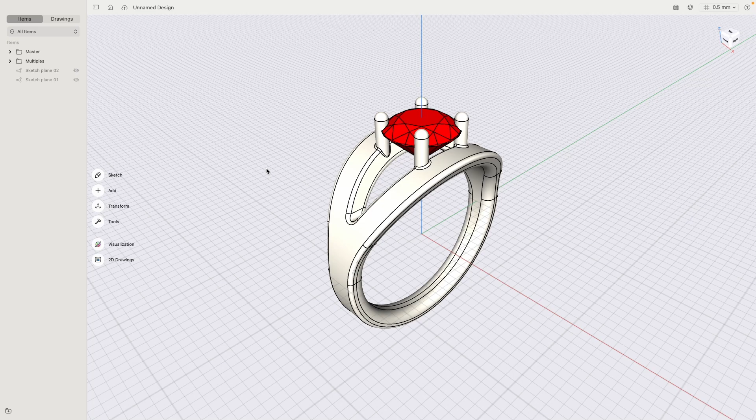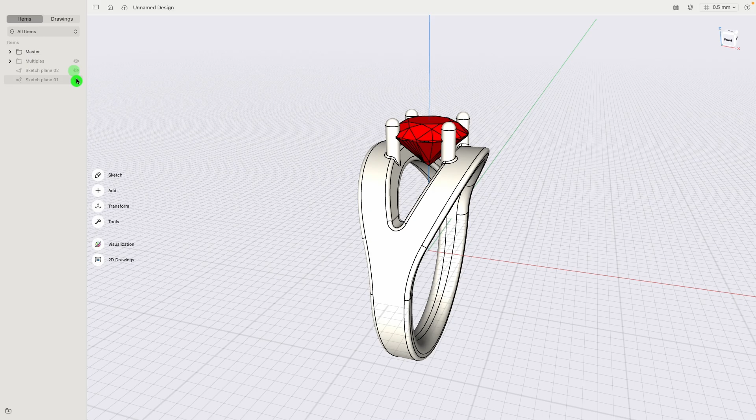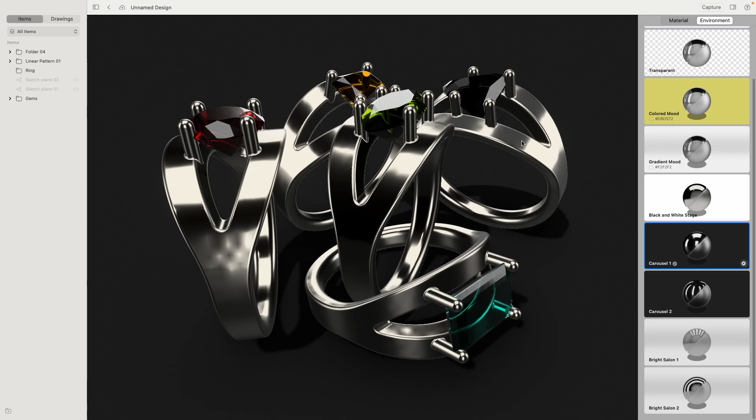Hello everybody and welcome to this tutorial on how to model a series of rings with gems and prong settings in Shapr3D. In this video I will start with the basic layout of sketches, then how we can build a masterpiece, make all our copies, and then bring everything into the visualization tool, add materials, and create really nice, stunning, and dramatic looking product presentations. And with all that said, let's do it.

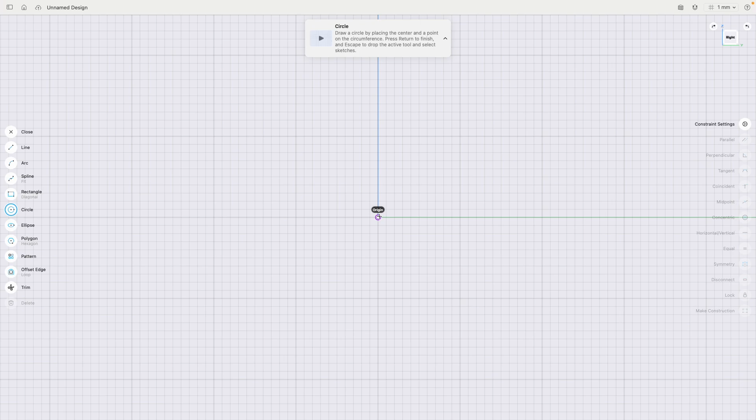Before we get started, let's make sure millimeter is our unit system and we have all our snapping options turned on. We will start with a side view of our ring. Go to the right view, then sketch, circle, and from the origin we will create a circle that is 10 millimeters in diameter. That's the opening of the ring.

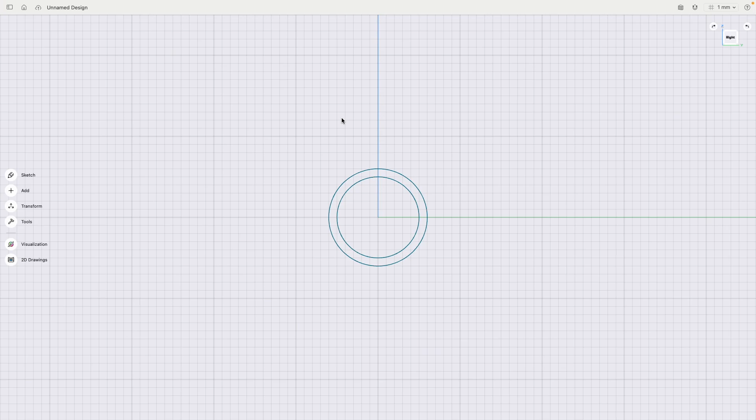And then we will create a second circle, 12 millimeters. That's the material thickness of the ring. Very good, our first sketch is done. We can go into a three-dimensional view, zoom in a little bit, and this profile is what we later would select to extrude out the first part of the ring.

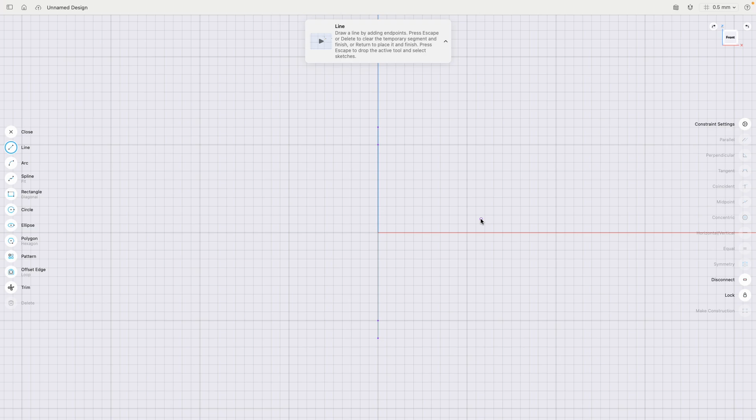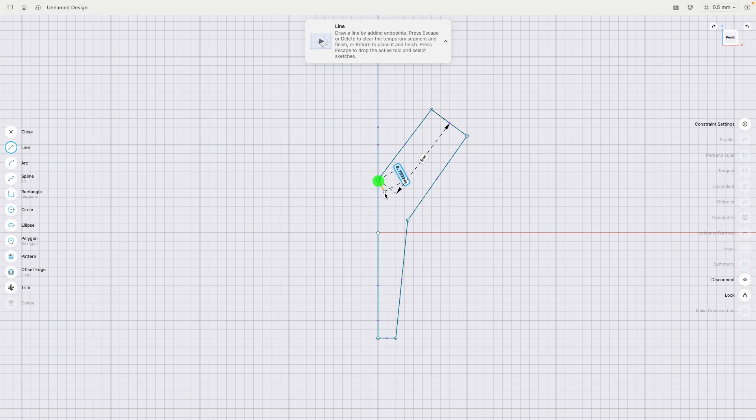But before we do this, let's go to the front view. Go to sketch, and now we will create the sketch that defines how the ring looks from this view. So again, from the origin, I draw a line down, 6 millimeters, then a millimeter to the right, a little bit up, then kind of like diagonal to the upper right corner, perpendicular to the left, perpendicular down, and I finish the sketch by closing it and drawing a line to the origin again.

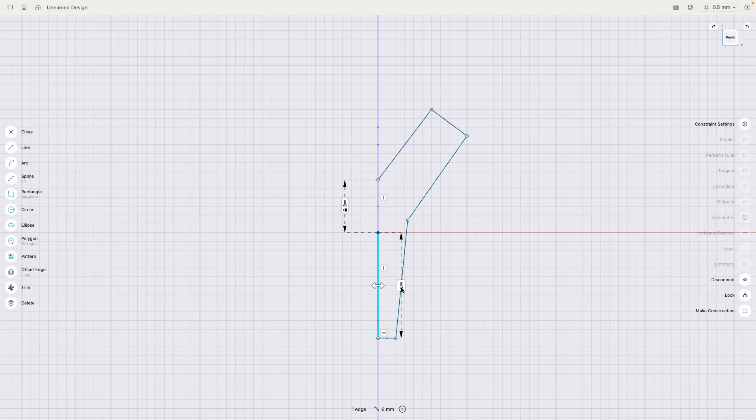Escape to stop drawing. The midpoint we would like to lock so it doesn't move. Select the midpoint and lock it. Now all vertical and horizontal lines we can give a horizontal vertical constraint. Then this line will be 3 millimeters, that is correct. This is 6 millimeters, that is correct. And the small line down here, this should be 0.75 millimeters. Very nice.

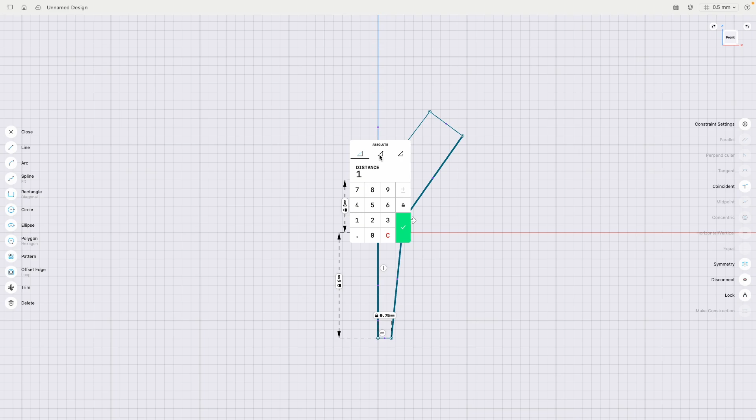From the midpoint to this point here, I would like to have a horizontal distance of 1 millimeter. So I enter 1 for 1 millimeter, and then I will select the horizontal orientation for the dimension. There you see, this is now the horizontal direction. These two lines I would like to be parallel, and then this line to this line will be perpendicular. This line I would like to be 1.5 millimeters.

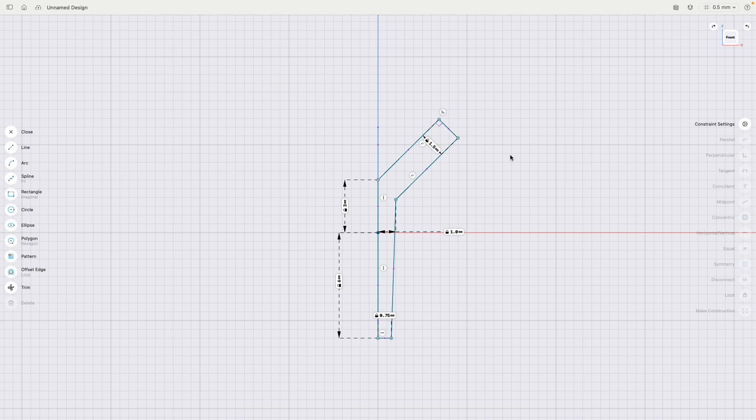Very good. Now the last thing to define is how far this is rotated. We can easily define this by selecting this inner line and the center line, and then for the angle we type in 155 degrees. Very good. This line can also be a little bit bigger. It should be above 6 millimeters from the origin.

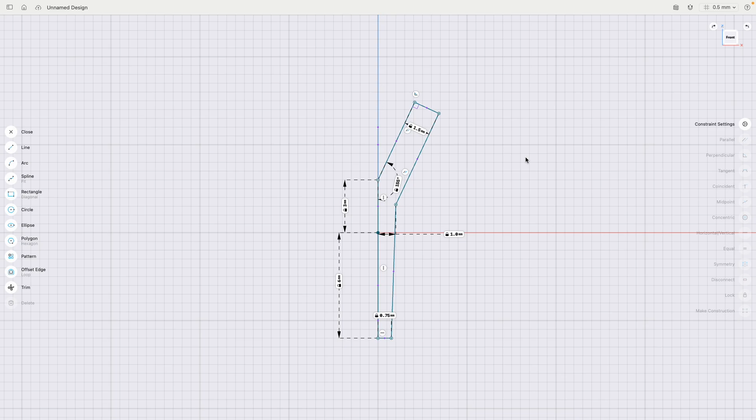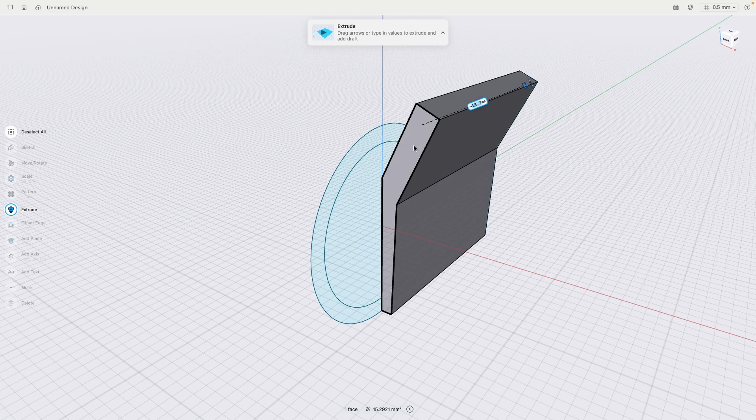Okay, so with all this done, we can now go into a 3D view because now we have all the sketches necessary to model the ring. I will start by this half Y shape and extrude this a little bit to the back. Then I select the front face, extrude this a little bit towards us.

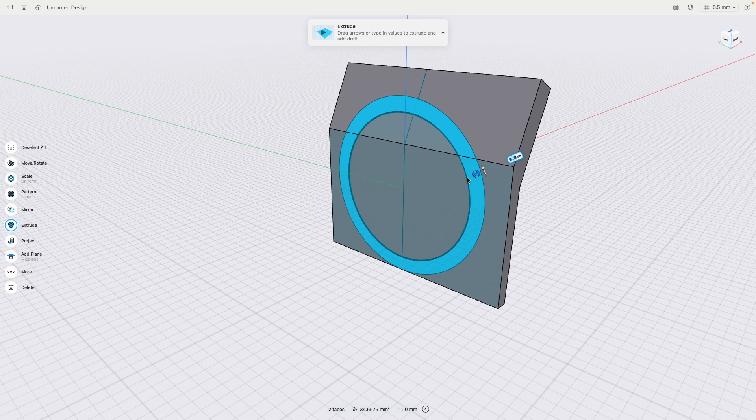And seen from here, you see it just has to be wider than the ring sketches. Then I will select the profile of both ring elements, so it's now a complete included ring, and extrude this to the right side. And then instead of making a new body, I say I would like to have the intersection. And the moment we do this, you see the extrusion then gives us the result of the Y volume and this ring volume.

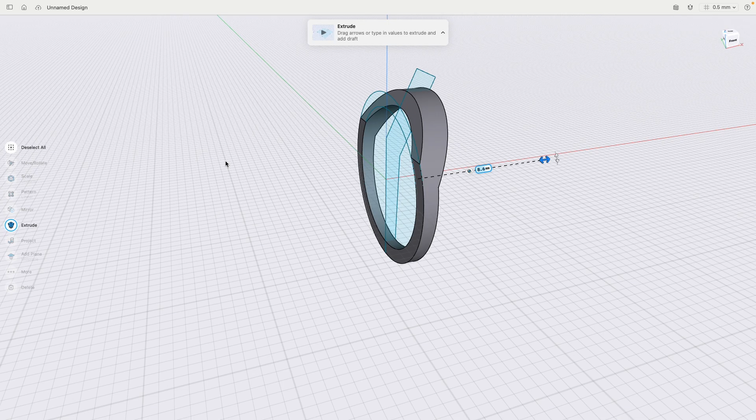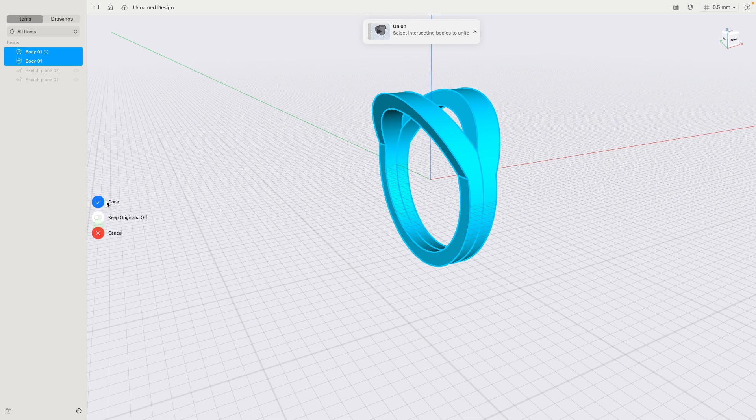Very good. To make things a little bit easier, I turn on the item list and hide the sketches. Now we have kind of like half of a ring. We can double tap it and then go to More and Mirror Copy Over. Select both bodies, and then with Union we fuse them together. There's now actually our raw complete ring. See, very easy. This has very sharp edges.

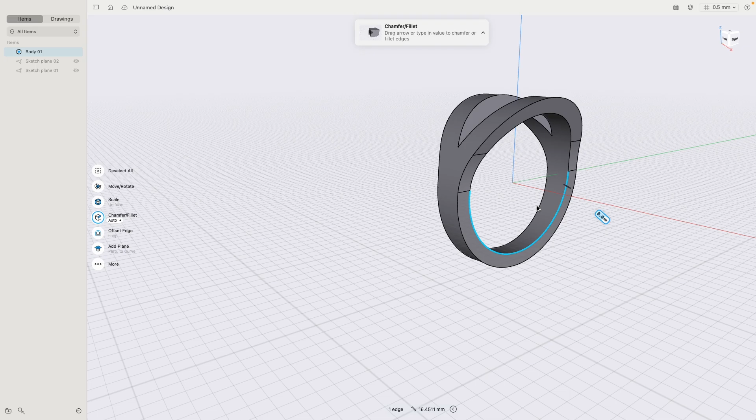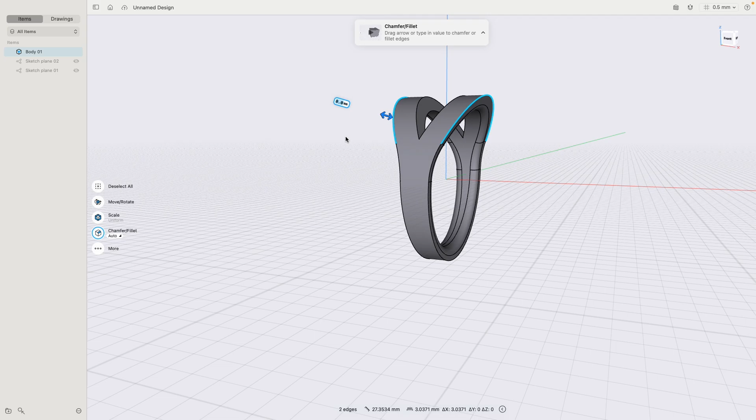With these outer edges filleted, now we can select, for example, these two inner edges here and fillet those a little bit. G2, 0.6, that's very good. Then we can also select these outer edges up here and we round those with 0.2 and G2.

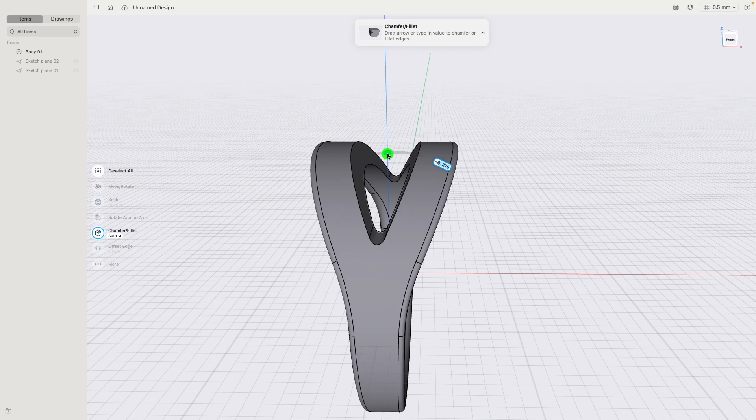Very nice. Now we have this V-shape center part. Before we round it, we need to round these sharp edges here. So I select these two edges, bring this up a little bit, then G2, and we can play with the shape a little bit. So from a more V shape, I turn this into a more rounded, soft shape.

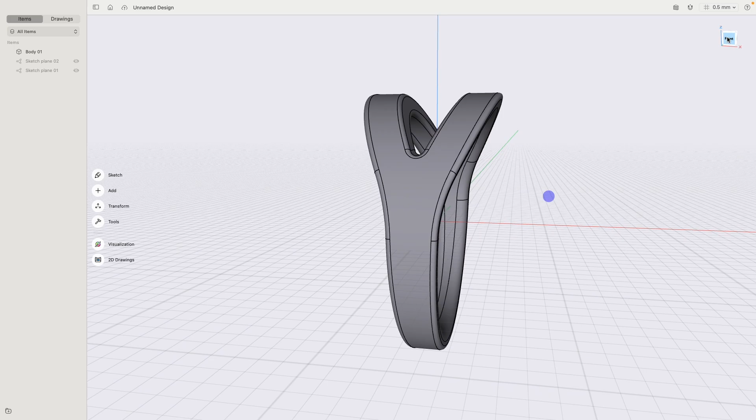Very nice. So with this done, now we can go ahead, select all our inner and outer edges, and also round those 0.2 G2. Very good. Now we have actually created a really nice ring, that from this view looks like a Y, and from here is nice and circular. So our finger will perfectly fit into there. Very good.

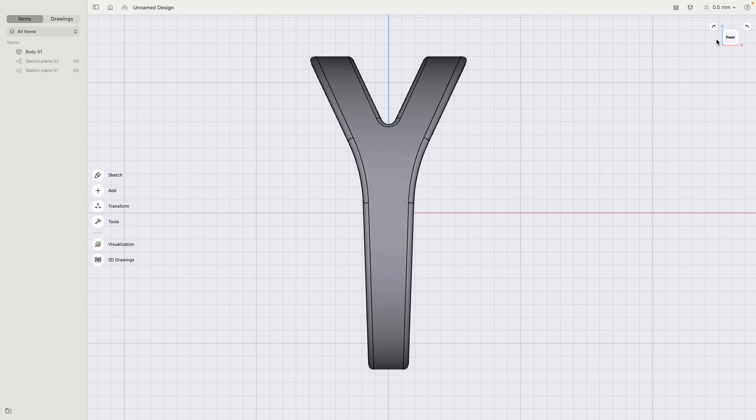Perfect moment to import and insert representational geometry of gems we would like to use, like a round brilliant, as you can see here. This is really good because I can verify how big the stone is, how big the ring is, and we can think about the stone setting.

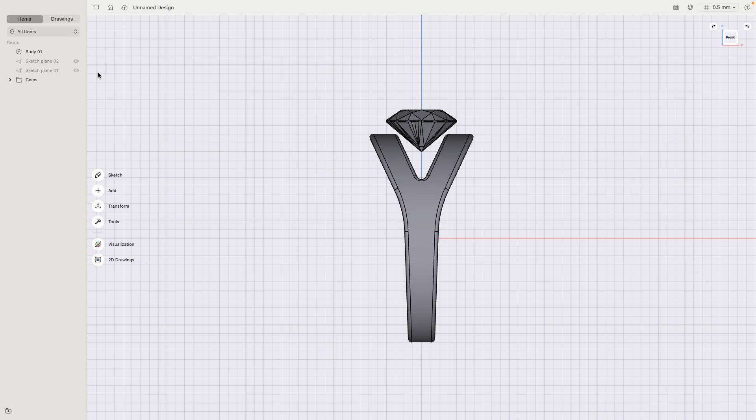In this case, we will create a very basic prong setting. I'll hide the ring, show the front sketch, zoom in a little, go to sketch, rectangle, diagonal, and from this upper left corner draw a rectangle at the height of the stone. The dimensions can be 0.35, so 0.7 millimeter diameter, and for the height I'll set this to 2.4 millimeters.

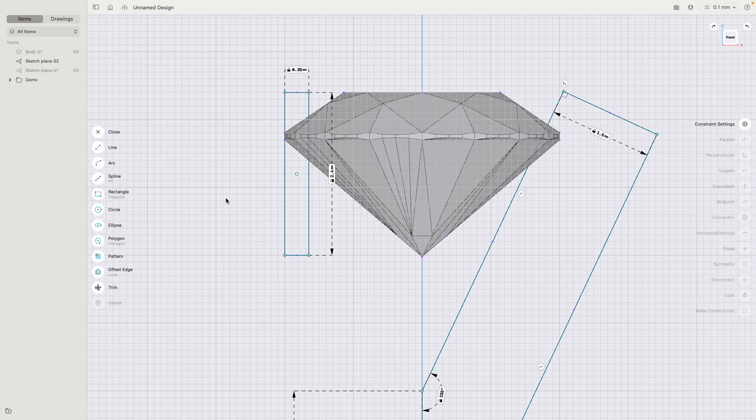The sketch doesn't have to be super precise because we will, via direct modeling, adjust the prongs later anyway. Let's close the sketch. We're going to a 3D view, select the sketch profile at the left vertical line, which will be the revolve axis, and let's revolve it.

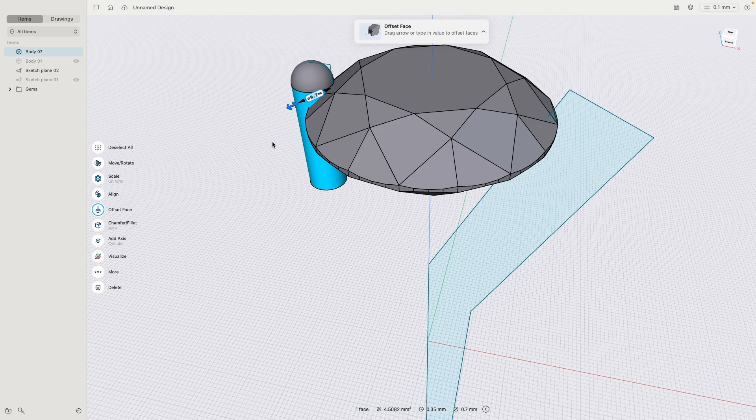Very nice, there's our prong. The top we will round later. We can do this via a fillet of 0.35 millimeters, that's half of a 0.7 millimeter diameter. This dome is a little too close to the ruby, so select the dome face, then go to move, and we move this up by 0.25 millimeters. There we are, very good.

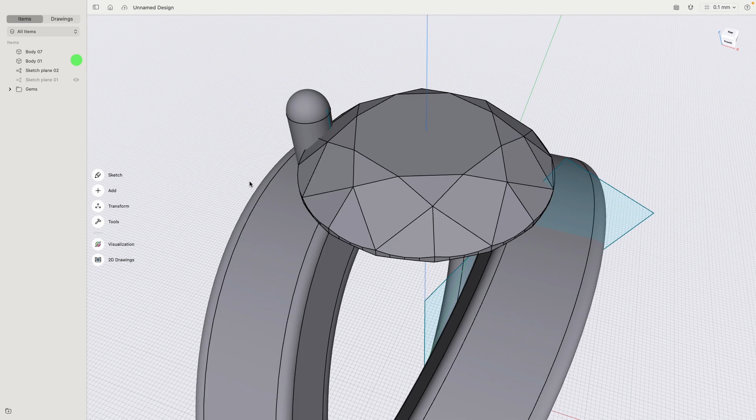Okay, let's take a look at everything with the ring. Very nice, but the prong is at the wrong position. Let's rotate this by 45 degrees. That's very easy, you can double click the prong, select the Z-axis. We started everything centered in our design, that's the reason why we can do this in this case.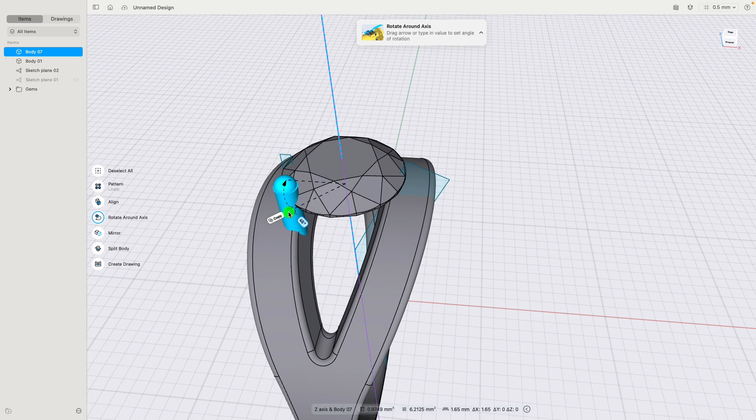And then look at this, we're already in rotate mode, 45 degrees. But we need actually 3 more. And you can select the prong.

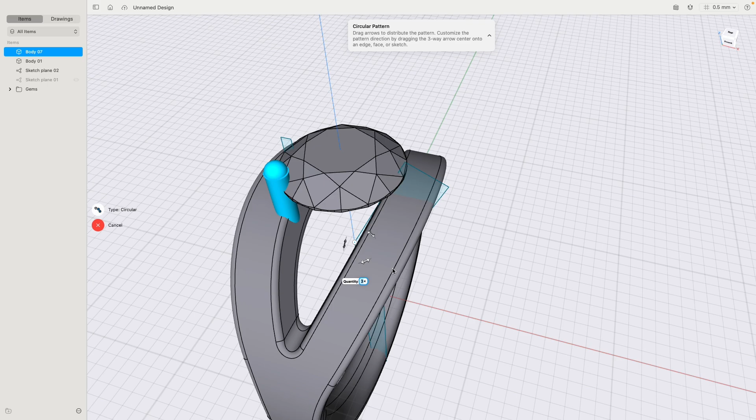Then check this out, we go to pattern and circular. There is a tool widget, which we move to the sketch, right at the center. Then here we can rotate our copies out. I would like minus 360 degrees, so one complete turn, and 4 copies. Done, look how easy that is.

You can verify how everything looks. The prongs are actually perfect, size is good, height is good, and they don't go through the ring.

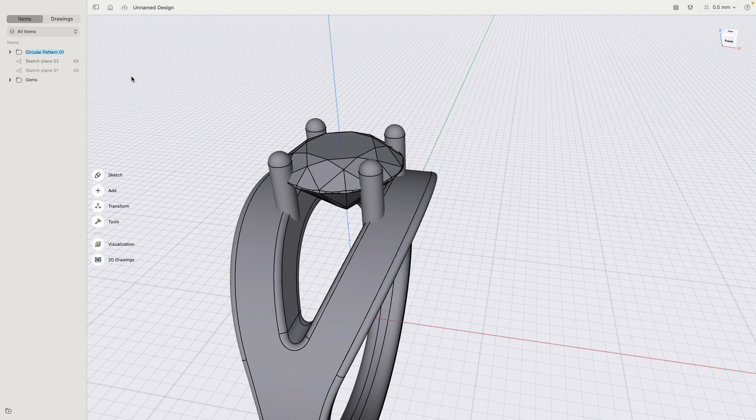Perfect, so at this point we can clean up our scene a little bit. I will bring this body into here and then rename this into ring. And that's actually how easy it is to quickly create the prongs for this particular stone and this ring.

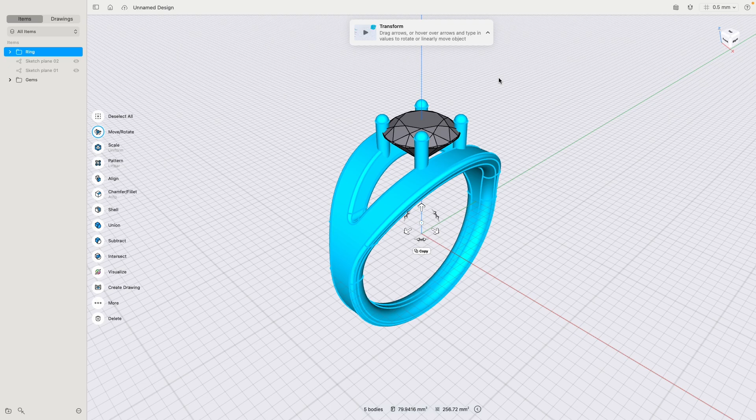But at one point we also would like to create multiple patterns, so different variations with different stones, etc. So this folder I would like to multiply, so I go to the front view. I will select the pattern tool and drag this one out. And you see, because I selected the folder, it makes a copy of everything that's inside the folder.

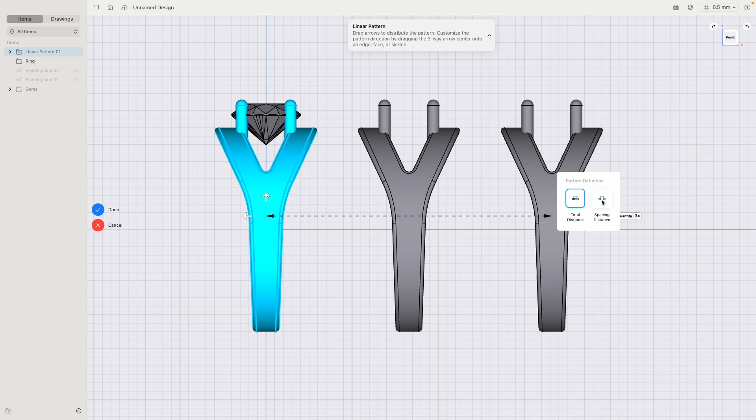That's so perfect. Let's go to total, we change this to spacing distance. I would like this to be 20 millimeters, and please give me 5 copies. Done, very nice, so now I have 4 more copies.

The prongs are also not fused to it yet, because when we put in individual stones, they all need different positions.

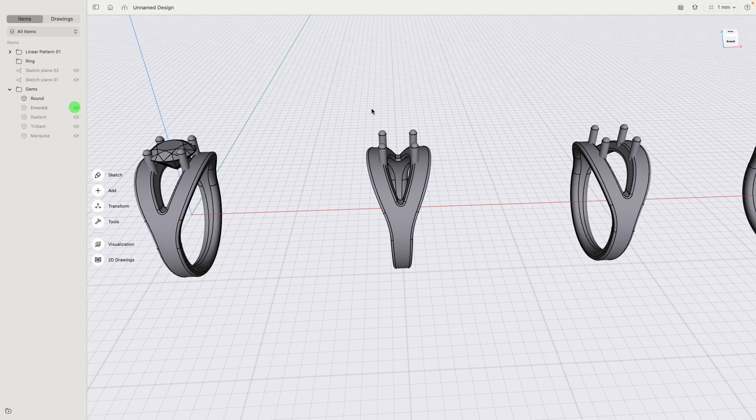All those I will select, put into a new folder. There we are, and drag this one out. Now this, for example, for all the other parts. And then here we have now everything for our first ring. Next step, we can talk about how do we fuse the prong to the ring.

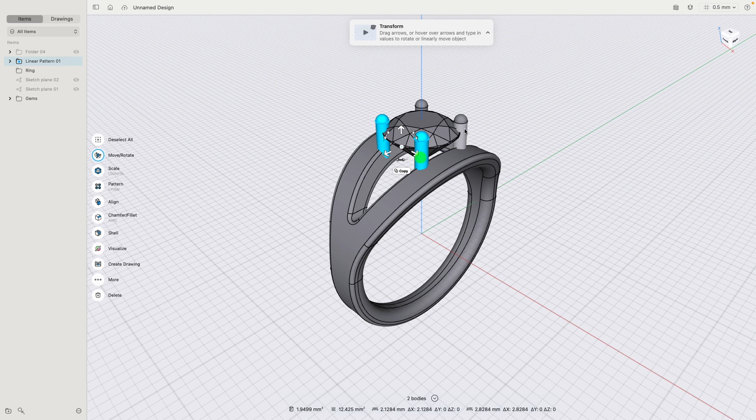So we can select the 4 prong bodies, then select the ring and do a union. There we are, very good. We have very sharp edges.

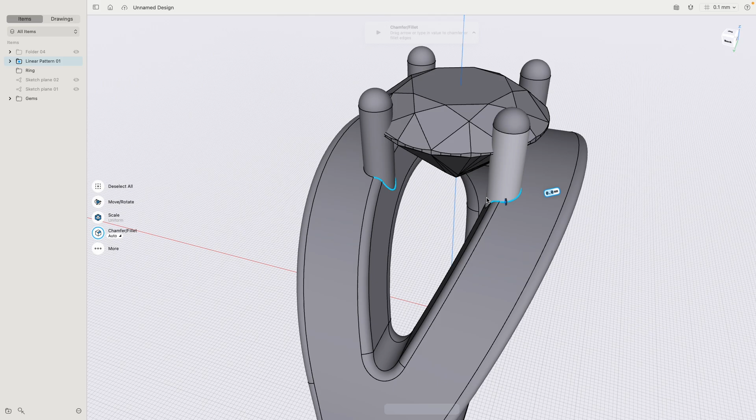These I will select, I'm selecting 2 edges here, and then I would like this to be filleted by 0.1 millimeter. Based on your design, you can experiment with the values. And we will change this to G2 to just look nicer. Very good, and that's actually how easy it is to make the prongs.

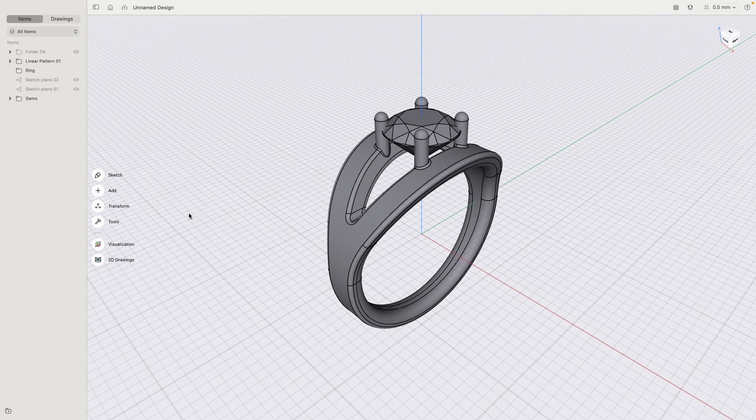The only thing missing here, particularly when we bring this design into the visualization tool, is the prongs are actually intersecting the stone. We zoom in here, there we can see this. This is not good, so we need to cut out the space of the stone from the prongs.

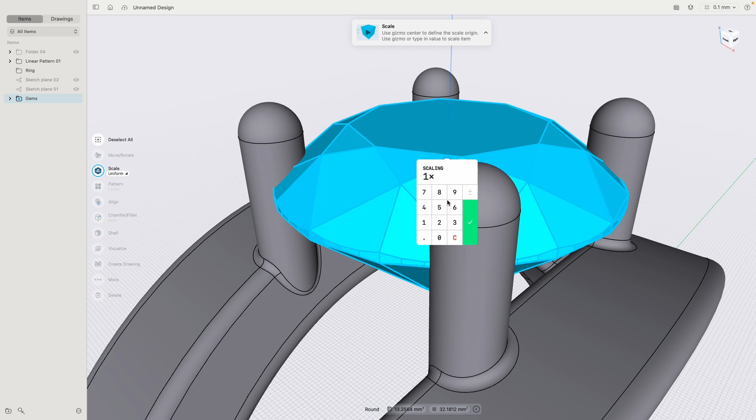We do it in the following way. We select the stone, go to Scale, Uniform, Copy, click on this, and say 1.01, then enter. So we just grow the stone a little bit. In real life, I would cast the prong as it is, take a burr, and cut out this kind of space for the stone to fit in.

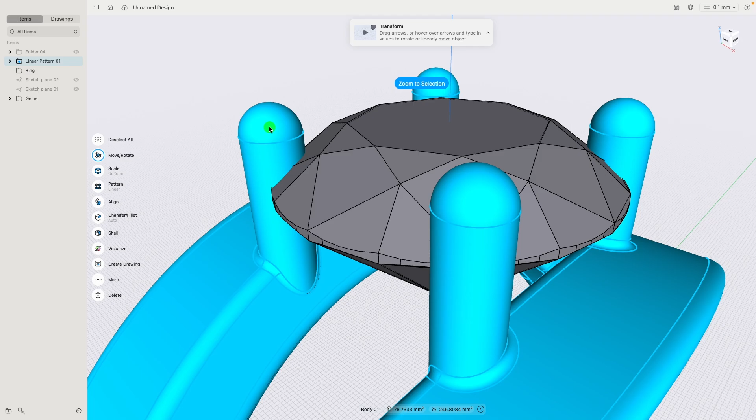In CAD, we have to do this a little bit different. Now I can select the ring, select this stone, go to subtract and remove it. I have keep none turned on. Click done, turn this off, and there you are. You see this space of that stone got removed actually from the prongs.

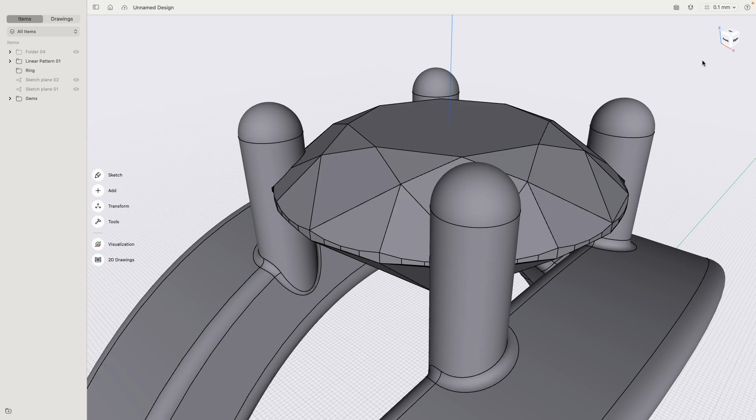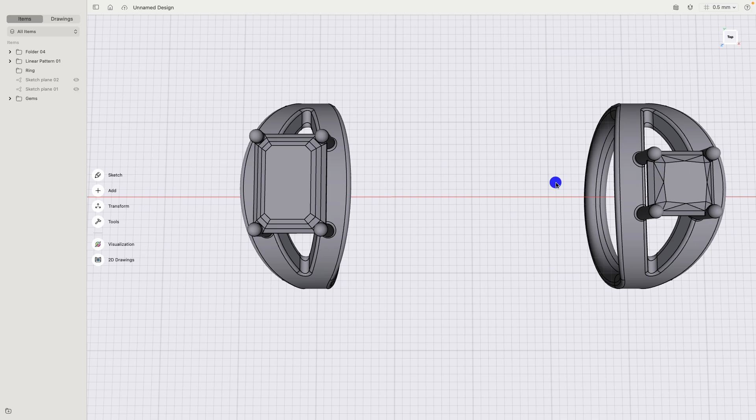And then with a little bit more work, you can customize the prong setting for all the individual gems. Sometimes I move the gem simply up and down, left and right, or along 45 degrees. I rotated them 45 degrees and moved them 45 degrees. Very easy. As you can see, I joined each prong to the ring and did the fillet and the cutting. That's all. Basically, that's how you can quickly create multiples with various stones.

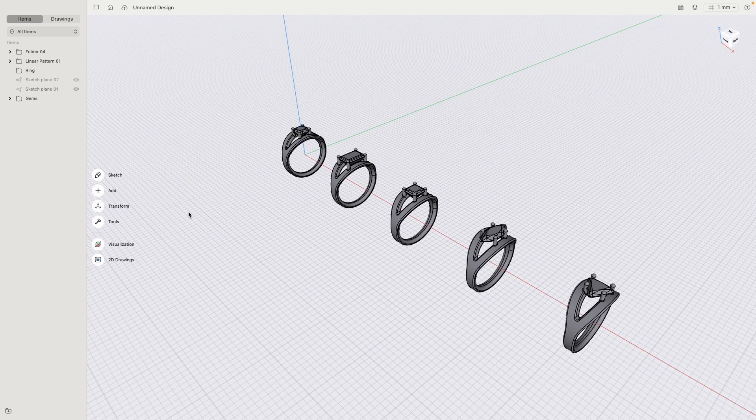We're ready to send our design into the visualization tool and explore actual materials. So let's go to visualization. Go to this view, then with the mouse from the right, I draw a selection to the left. I can press Tab or B and select only the bodies. Now I have all 5 rings selected.

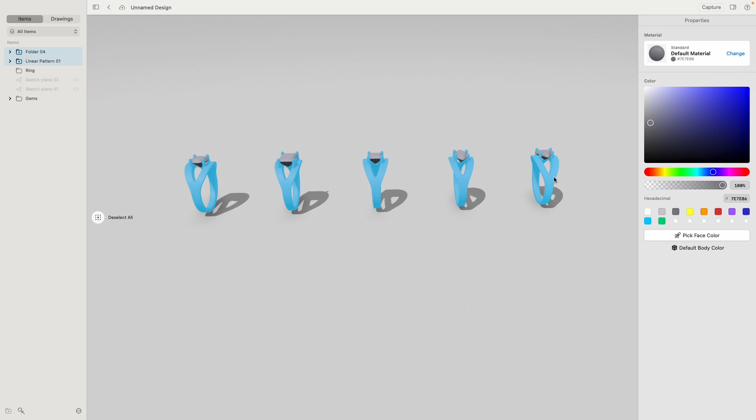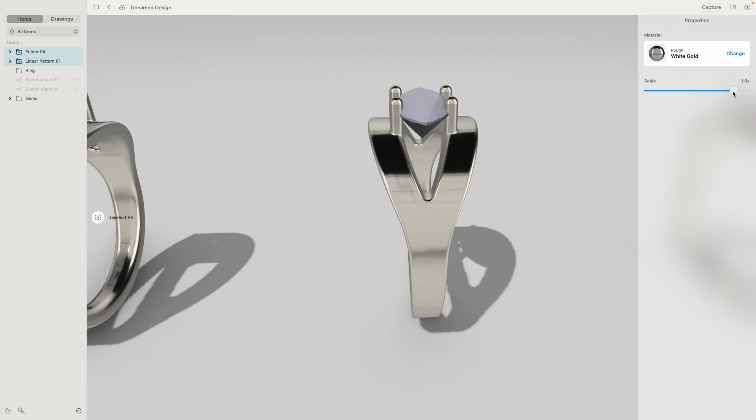Perfect. Go to change, then I will go to metal, scroll down and select white gold. Click somewhere else, and the scale here I increase a little bit. The scale has pretty much an effect on the surface, how bumpy it is. It's not very structured, but not 100% machined perfectly smooth, so kind of like a scale like this will be fine.

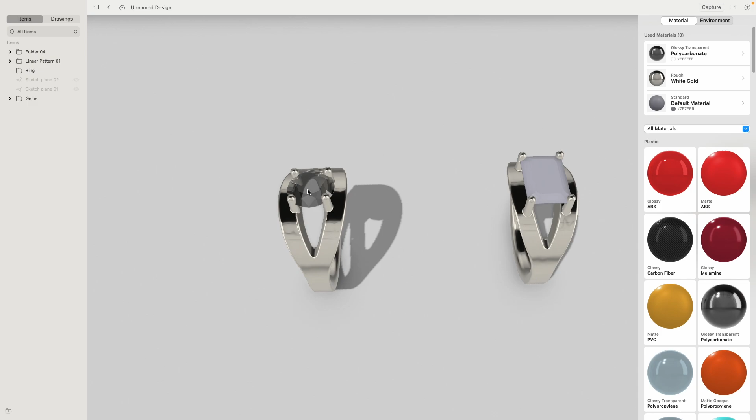And then we can start working on creating representations of our gem material. For this, I will use a polycarbonate material. That's a nice material because it's nice and transparent, looks very similar to the gems. When I click this material, I can drag a slider up to there, and you see this colors this material. So there's actually my ruby. Very nice.

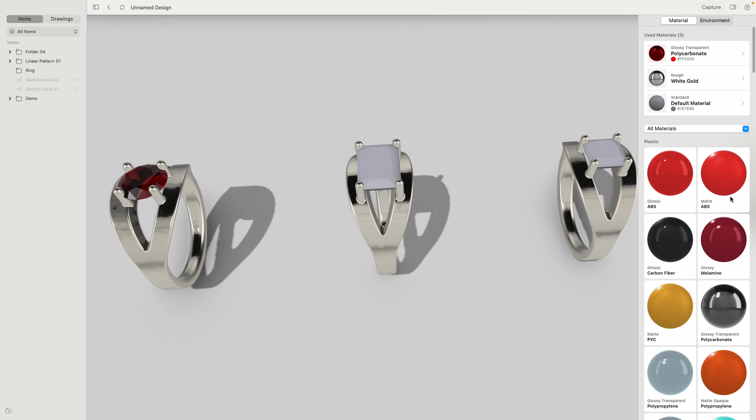We can drag this material also to here. When I double tap it, check this out. So this should be aquamarine. Here is a hex field. I type in 7FFFFA and enter. Click somewhere else, and you see now I have 2 materials.

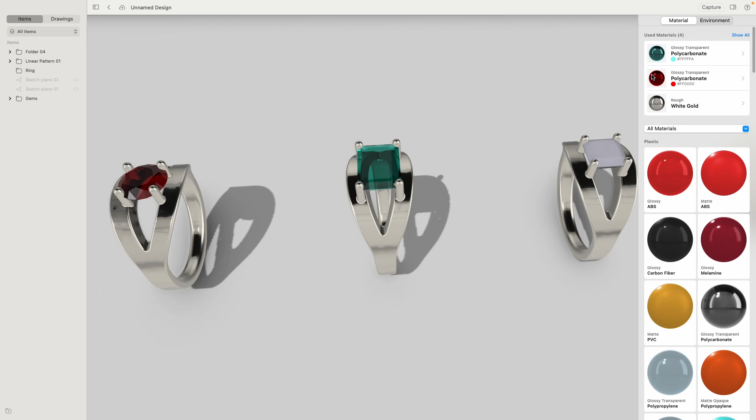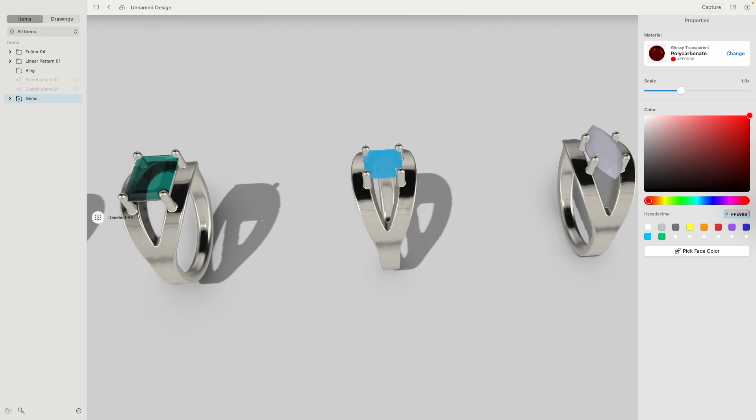So when you adjust the material on one face or object, it makes a copy. Here we can go this way, select any copy, and then we change the hex color here. So this will be FFE90B, like a nice citrine. And here, the peridot will be E0F430. You can also look up these values on the web.

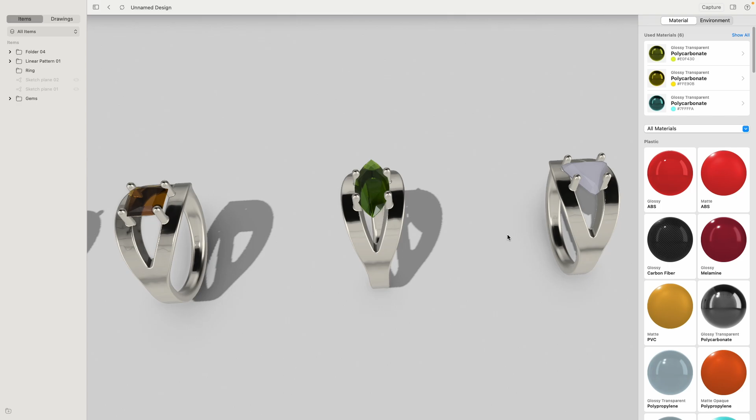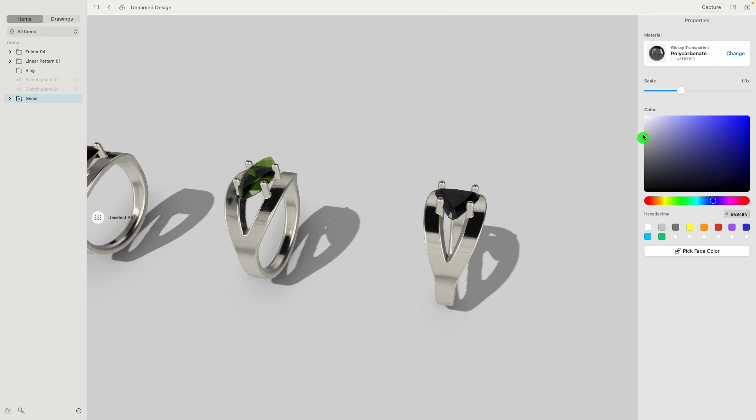And for the last stone, I actually would just like to have a very basic polycarbonate. Now we can make this black too, it doesn't have to be white. We can make this a little bit more transparent or actually more opaque with the slider here. This looks really cool actually. Maybe a little bit darker. There we are.

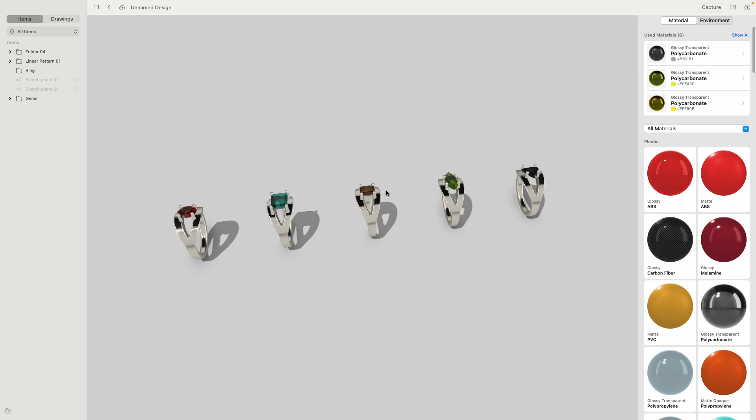Very good. So this is then actually how easy it is now to create the materials and check out how everything could look, to capture a much more interesting composition and representation of the fun of this design.

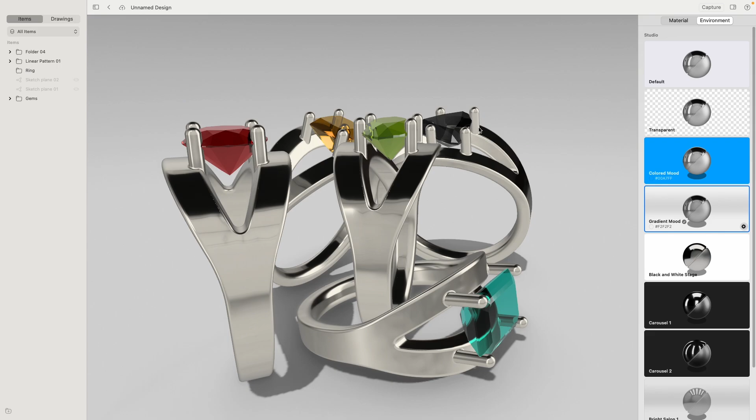As you can see, I stacked and moved all the rings randomly together. Being nicely lined up is good if you want to compare design features, but if you want to create something that looks dramatic and interesting and inviting, you need interesting visual compositions. And here we have a lot of play elements too.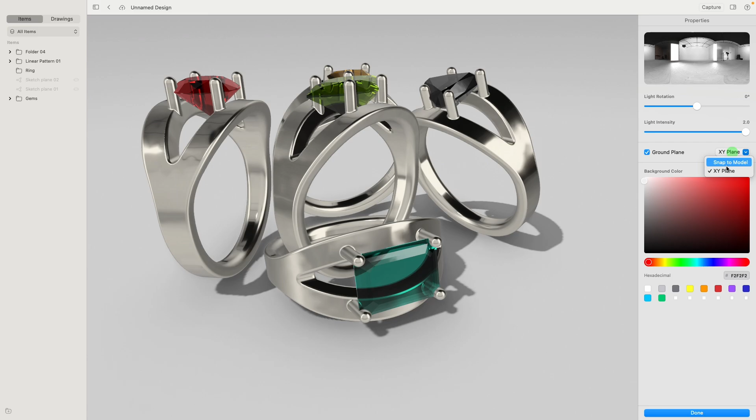Now we started here with the gradient mood. Let's expand this for a moment. Also here we have the ability to rotate the light. You can also play with the strength of the light or have a drop shadow. This is actually set to the X and Y plane.

And let me go back for one moment. You see how I moved everything above the ground plane. Originally with the sketch, everything was a little bit below, so I moved it all up.

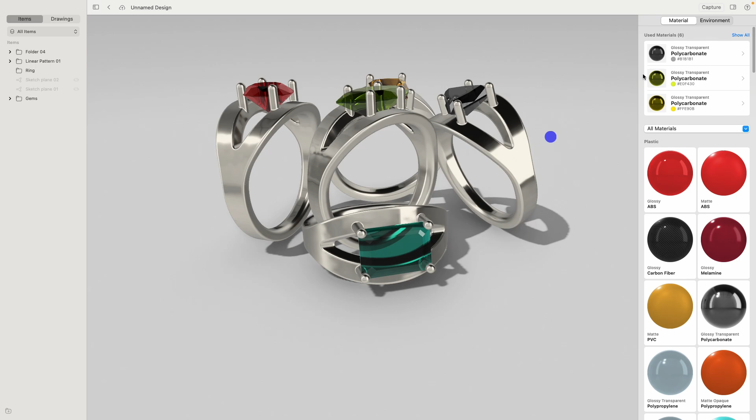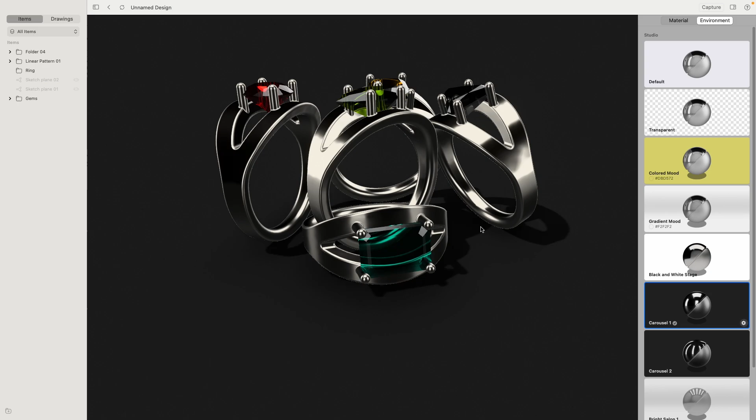Going back to the environment, we also can create a nice colored background, give this background a good color, maybe something that gets similar also to the gold. Or a really dark environment - that looks also really great because it mystifies everything a little bit and makes the stones really nicely pop.

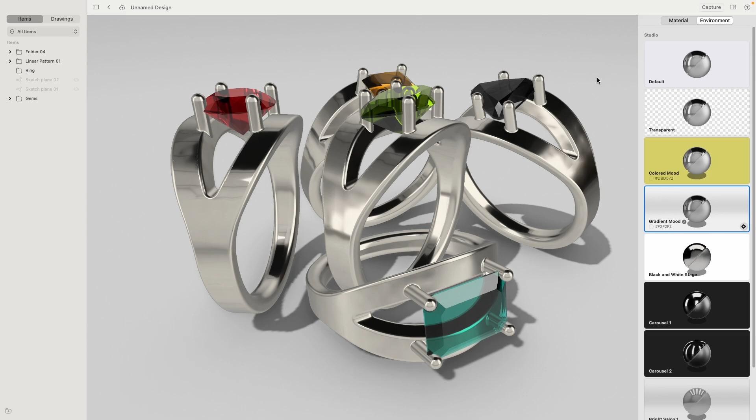And then to create the rendering, you simply go to capture. And that basically is, in a nutshell, how you can use the visualization tool to not only create material representations, but also create really beautiful looking presentations of your design idea.